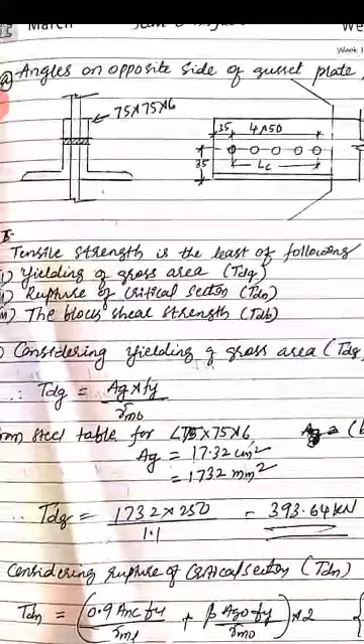In this lecture I'll be solving a problem on design of tension members, considering angles on opposite sides of a gusset plate, that is two angles provided on opposite sides of the gusset plate. In previous lectures we saw a single angle connected to the gusset plate. Here the arrangement is a double angle on the opposite side of the gusset plate, or back to back angles.

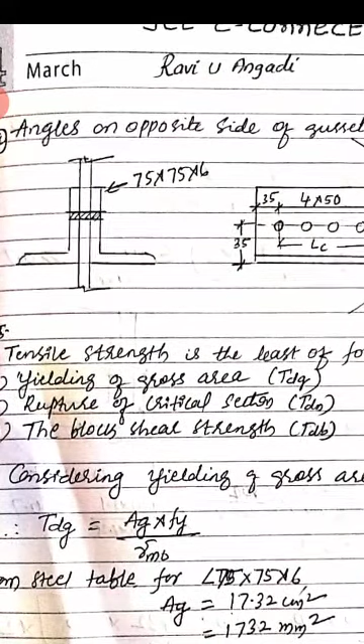The angle section is 75 by 75 by 6. This is the arrangement of bolts given: 5 bolts, edge distance 35, pitch given as 50 for 4 pitches. The length of the bolt line from the first bolt hole center to the last bolt hole center is marked as LC.

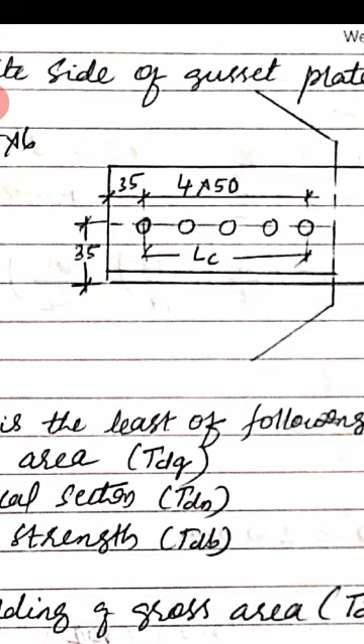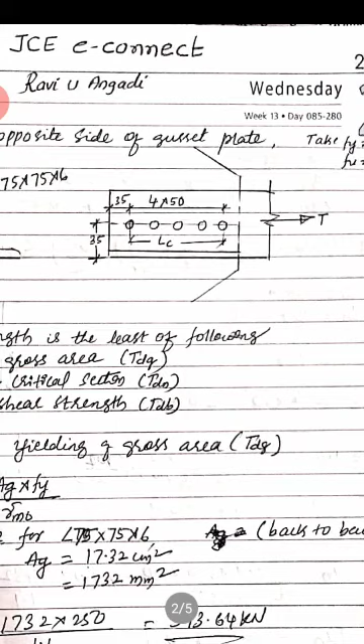This is the connection arrangement given. If not given, and they only mention the number of bolts provided in a single row, then you have to draw this figure. Here we need to calculate the strength of the tension member.

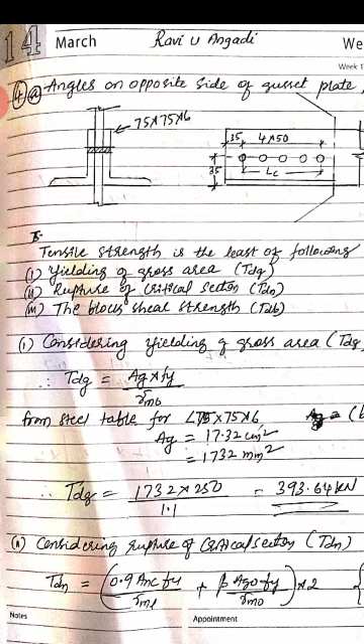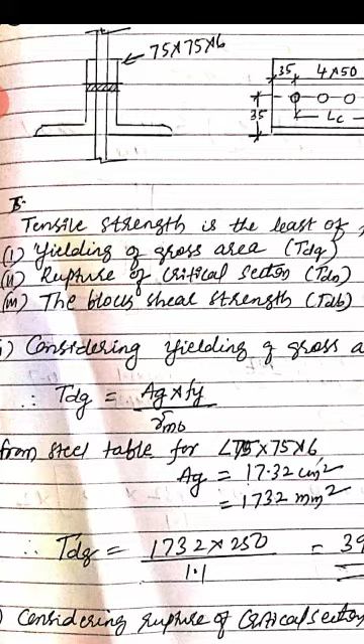As we know, the strength of the tension member is governed by three modes of failure: yielding of gross section area, rupture of critical section, and block shear strength. These are Tdg, Tdn, and Tdb, which we need to calculate. Out of these three, whichever comes out least is the strength of the tension member. Let us calculate the first one, considering yielding of gross section area.

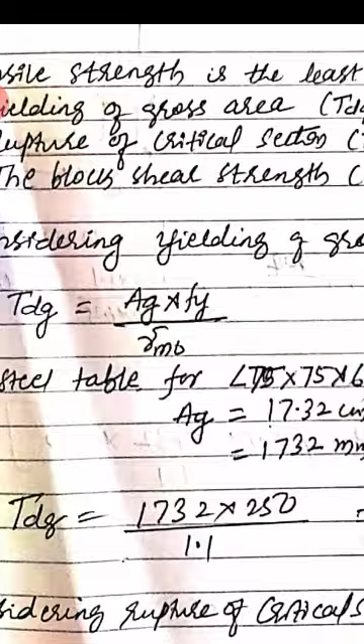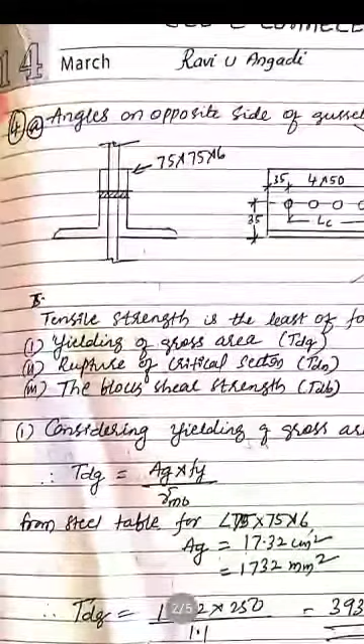Yielding of gross section area has a formula given in the code book: Tdg equals Ag into fy divided by gamma m0. From the steel table you have to get the area of the angle section. The angle given is 75 by 75 by 6, with double angle provided. Refer to the steel table for this section.

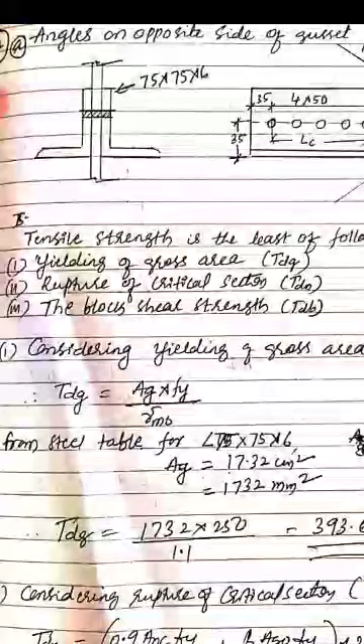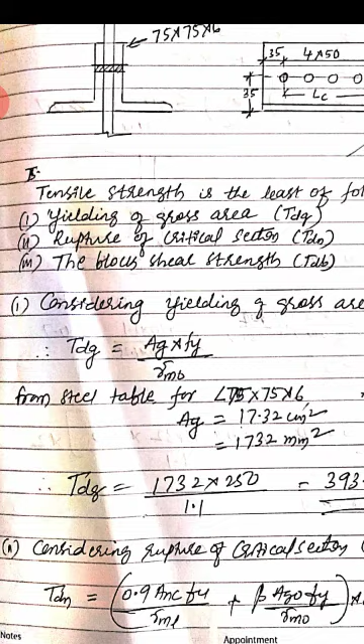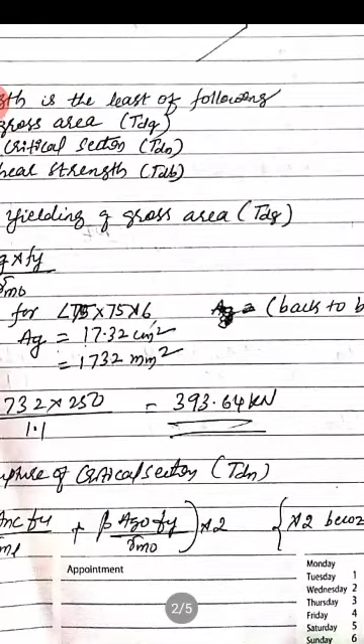You will get a single angle section as well as a double angle section in the steel table. If referring to a single angle section, take the angle area and multiply by 2, since double angle is given. Or if referring directly to the double angle, take the double angle area. Here the double angle area is 17.32 centimeter square, that is 1732 millimeter square, since the angles are provided back to back. Then calculate Tdg. Substituting all the values, you get Tdg as 393.64 kilonewton.

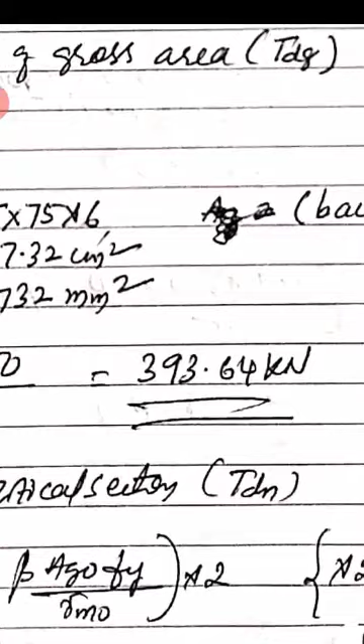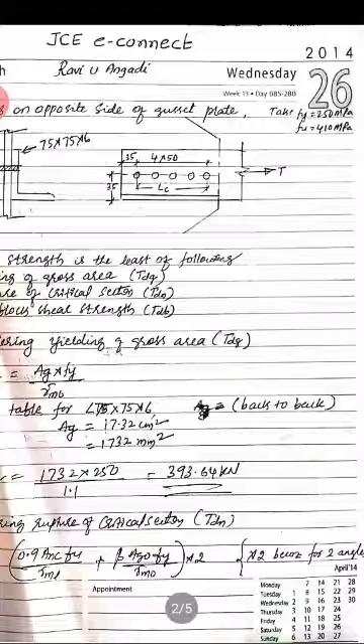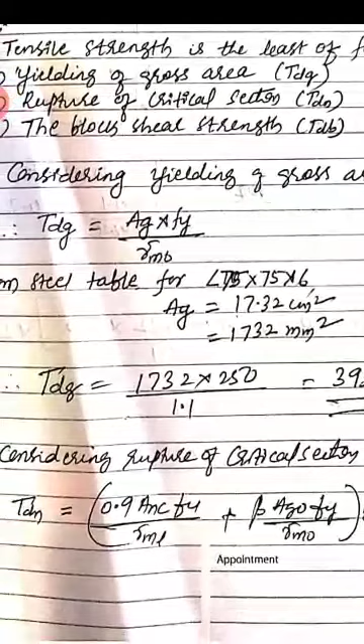Next, calculate considering rupture of critical section, that is TDN. The formula is 0.9 ANC into Fu divided by gamma m1, plus beta into AGO Fy divided by gamma MO, and this is multiplied by 2 because double angles are given. This formula is also from the code book, so you have to multiply it by 2.

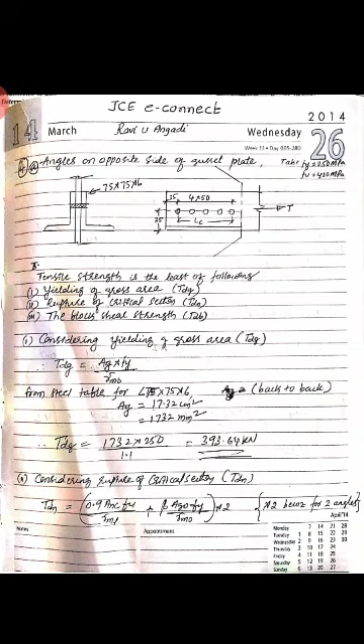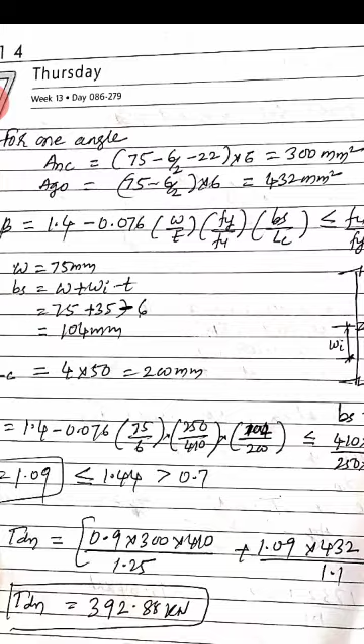Once you've written this formula, calculate ANC, which is for one angle. ANC is the connected leg area. Mark this leg area here - this vertical leg area for one angle. So calculate this leg area.

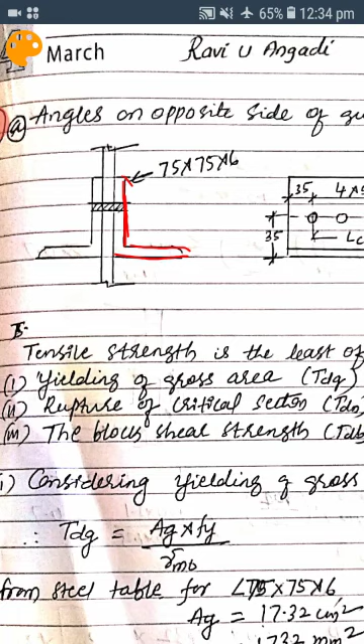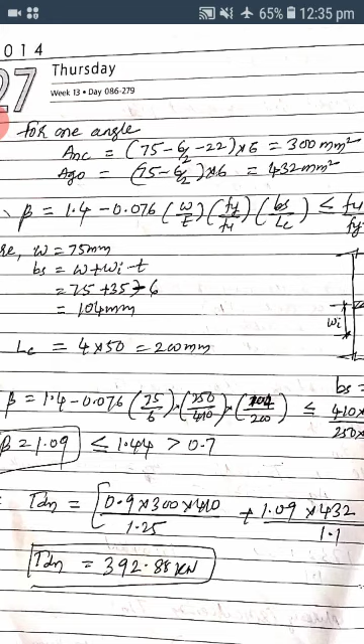The leg area ANC is calculated as 75 minus 6 by 2, minus 22, where 22 is the diameter of the bolt hole, multiplied by 6, giving this answer. Then calculate the gross area of the outstanding leg: 75 minus 6 by 2, into 6.

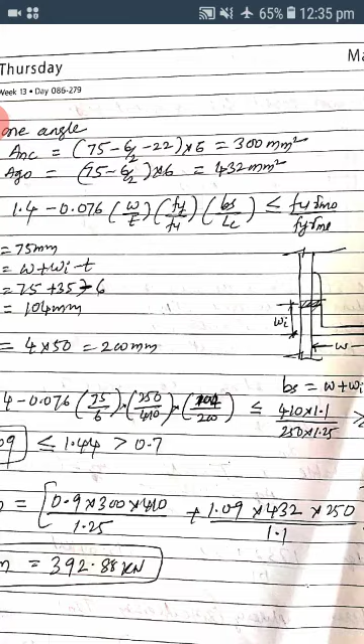Then calculate beta, whose formula is given in the code book: 1.4 minus 0.076 into w by t into fy by fu into bs by lc, which should be less than or equal to fu by fy into gamma mo by gamma m1, and greater than or equal to 0.7, where w is the outstanding leg width. This figure is also given in the code book - refer to it. It mentions which is to be taken, outstanding leg width or shear leg width, everything is given in the code book.

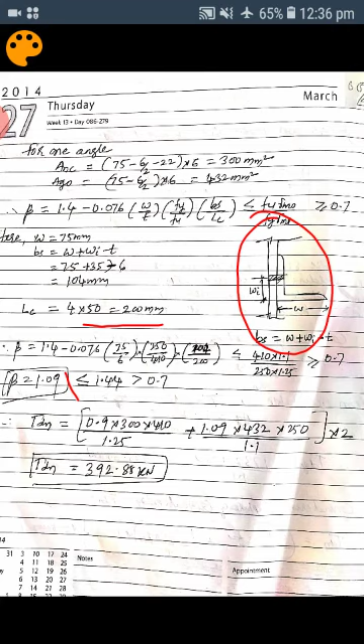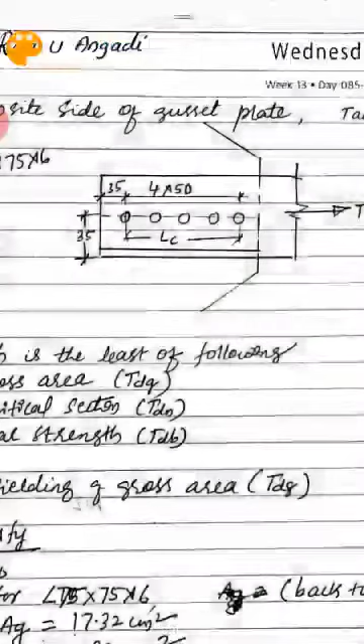So from the code, note down the formula, then substitute the values in the beta equation to get the value of beta. Here lc is the length of the bolt line from the first bolt hole to the last bolt hole, as marked here - this is LC.

Then calculate beta. After calculating beta, substitute the values in tdn, you will get tdn as 392.88 kilonewton. Then calculate the third strength, block shear strength.

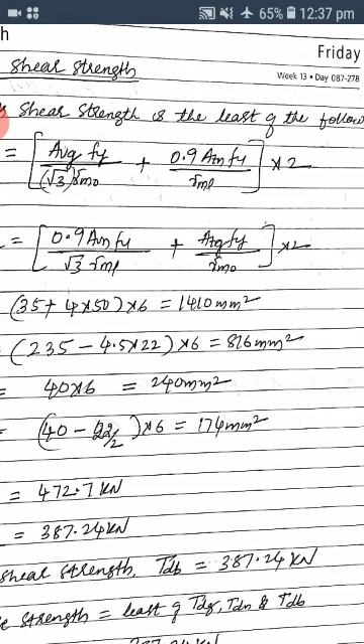Block shear strength will be avg into fy divided by root 3 gamma mo. This also you get from the code, and here you have to multiply it by 2 because it is a double angle. For a double angle you multiply it by 2, and this formula is for a single angle. When you multiply it by 2, it becomes for a double angle. Note down this formula.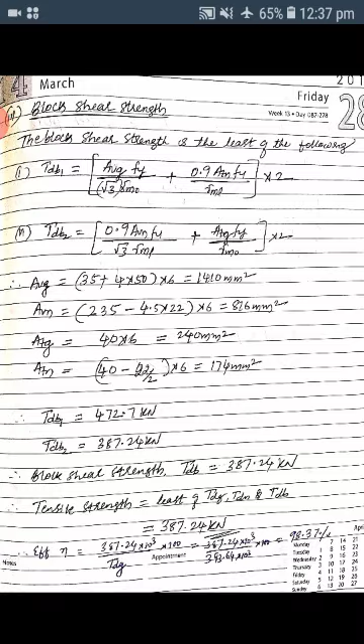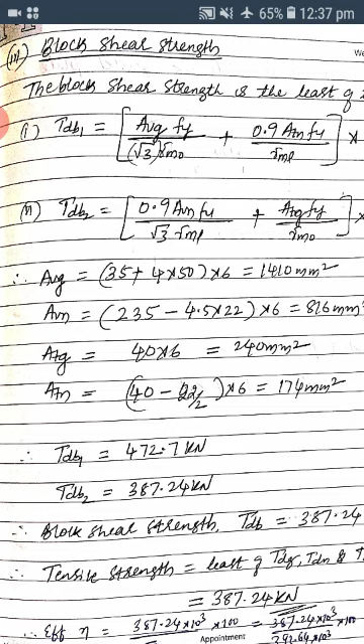Then calculate avg, then avn, atg, atn. This is how to calculate this, all explained in the first problem. Just in a similar way you calculate avg and avn, then atg and atn. Avg is the shear area that is parallel to the load, and atg is the tension area perpendicular to the load. Just mark the shear area, that is shear area means this one.

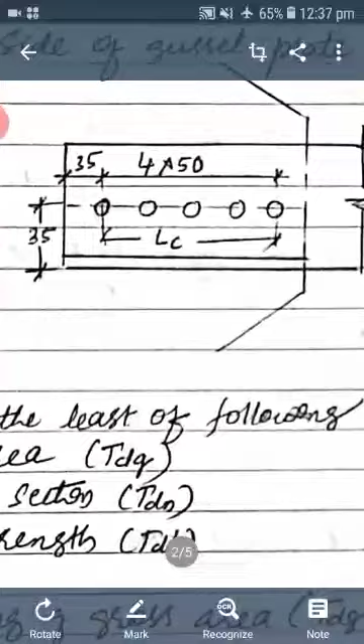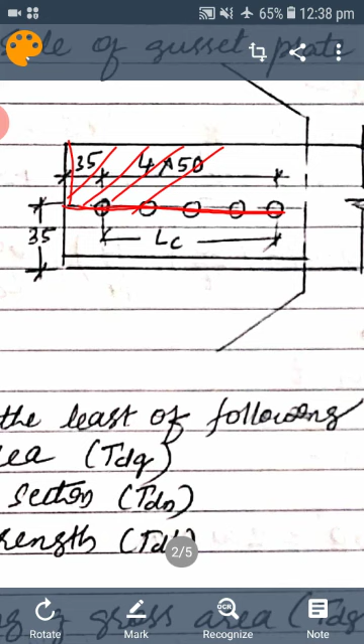So this will be the shear area to here, this is shear parallel to the load, and tension area is this side, this one. So this length will be lv, we take in calculation of avg, and this length is lt. Lv into thickness, lt into thickness gives the tension area, lv into thickness gives me shear area.

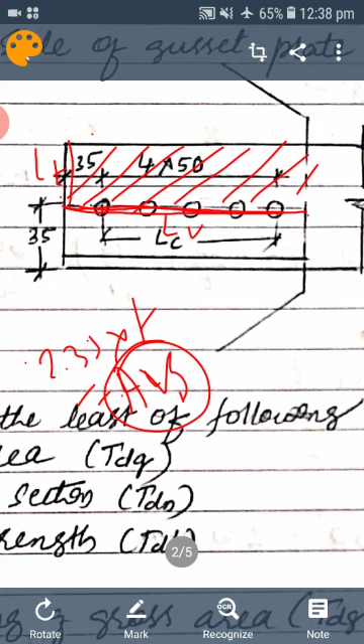Shear area, how to get: 35 plus 4 into 50, that is 200, 235. 235 into thickness gives you shear area avg, that is gross area. When you deduct number of holes, you will get avn. Similarly calculate atg and atn.

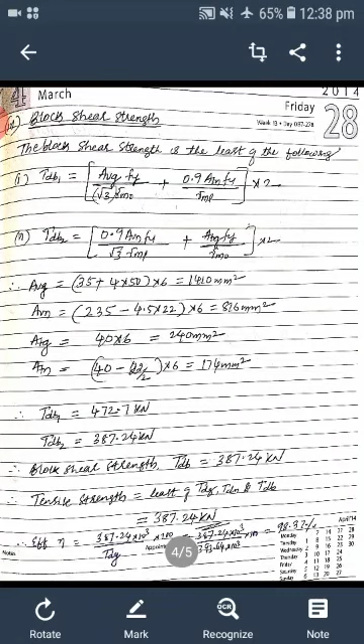Here avg is calculated, then calculate avn, then calculate atg, atn. Substitute in the above equation, you get tdb1 and tdb2. Then the least of these two will be tdb, that is this one.

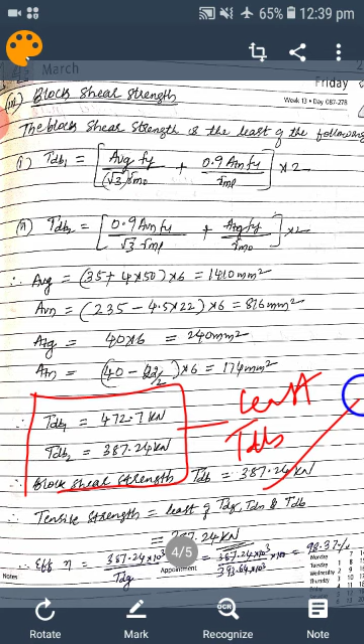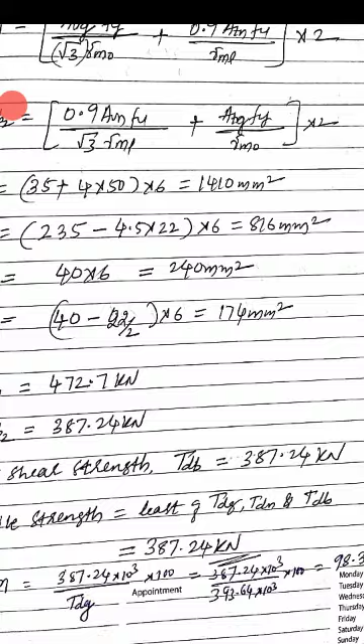Then the tensile strength becomes the least of three: Tdg, Tdn and Tdb, that is you will be getting 387.24 kilonewton. So this is for a double angle calculation of tensile strength of the member.

The only change when you compare with the single angle here is you have to multiply it by 2. You have to calculate for one angle and multiply it by 2. You will be getting the strength of the member. I hope you understood this one.

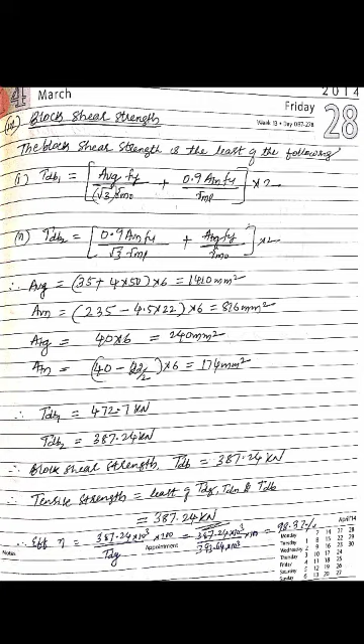Then let us take one. This is the assignment to take. A single unequal angle 100 by 75 by 6 is connected to a 10 mm thick gusset plate at the ends with 16 mm dia bolts to transfer a tension as shown in the figure. Determine the design tensile strength of the angle, assuming that the yield and ultimate stress of steel used are 250 MPa and 410 MPa.

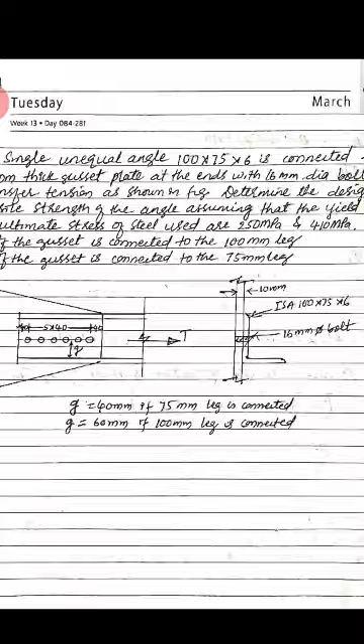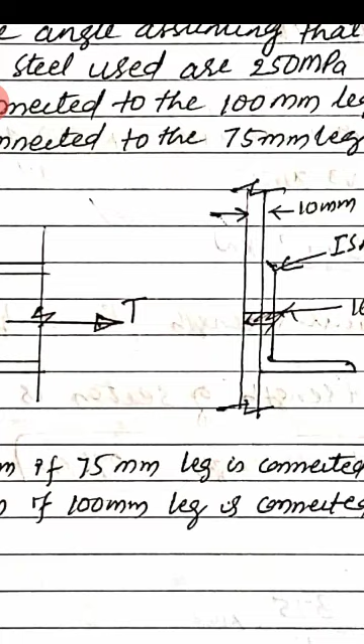Here the condition given is if the gusset is connected to the 100 mm leg and if the gusset is connected to the 75 mm leg. This is the figure given. Here number of bolts given: 2, 4, 6 number of bolts, pitch is 40, edge distance is 40, and the gauge is also given, and this is the section given, 100 by 75 by 6.

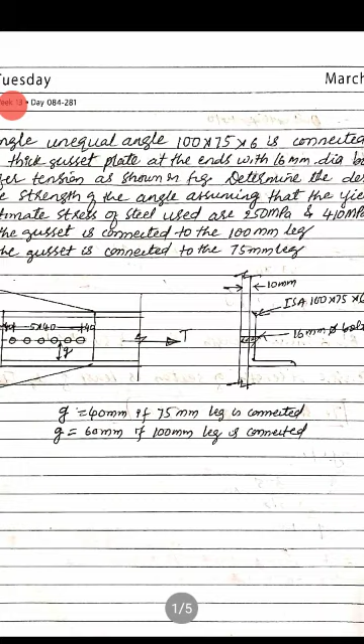And the condition is, when you connect longer leg to the gusset, what is the strength of the member? When you connect shorter leg to the gusset, what is the strength? When you connect longer leg to the gusset, you have to take G as 60. When you take shorter leg to the gusset, you have to take G as 40. Here it is given.

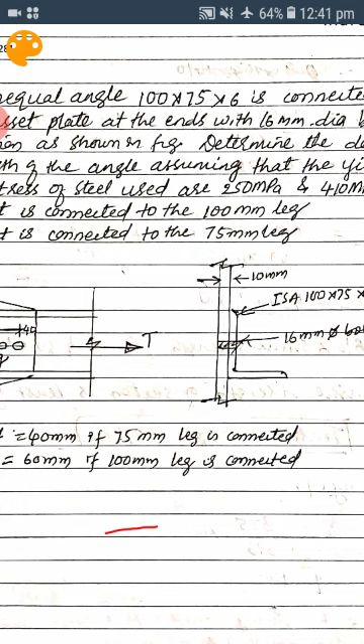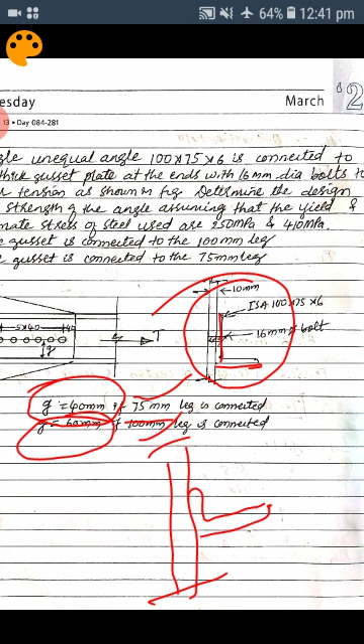This one 40, 60. When 75 is connected to the gusset, 75, 100. So in this figure, longer leg is connected to the gusset. For this, calculate the strength. When shorter leg is connected to the gusset, that time you calculate what is the strength. Take it as an assignment, solve it and practice it. I hope you understood this one. Thank you.